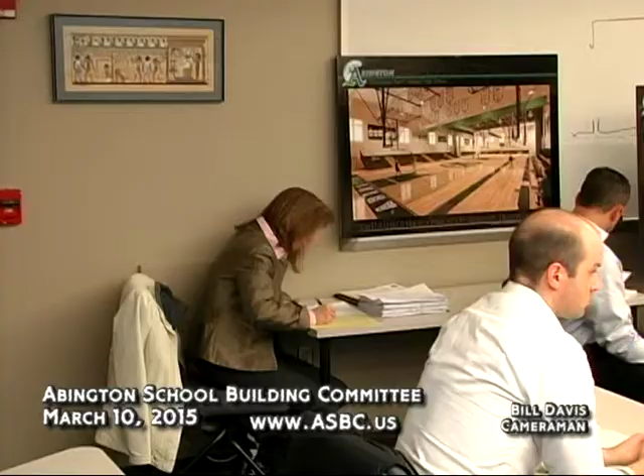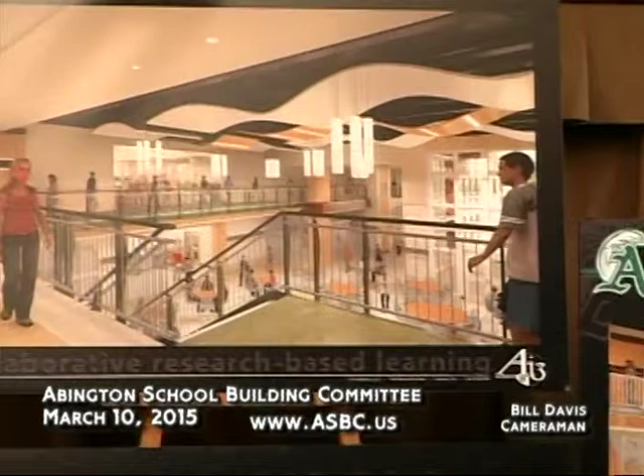At this point, I'd like to call Troy up to provide a design update. Over the past month or so, the designs have progressed quite well, and we can really start to visualize the space with occupants in it, how it will flow. Troy will spend some time going through each of those briefly so we can get a better understanding of the flow.

Thank you, Mr. Chairman. So we're going to spend some time going through the interiors. It's a very exciting part of the design process because everybody gets to visualize the interior.

We visualized or provided visualization of the exterior. Now with the interior, with the computer-generated images, it becomes a really nice tool to be able to see the spaces in greater detail. If you remember, probably two years ago, we started the process of the educational visioning.

It involved 30-plus people through that process, several series of visioning sessions, workshops to identify what the interior, the feel of the interior, what the overall concept would be, beginning the process.

And we've gone through the exterior, the organization of the floor plan, the volumes, the adjacencies, the wayfinding, and breaking down this sizable building into a really nice scale for the students and individuals coming to see the building.

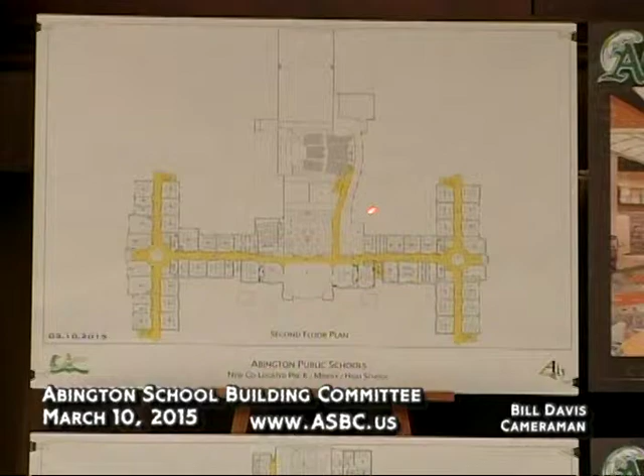The gymnasium. We're going to be talking about these spaces specifically: the cafeteria, the middle school cafeteria, the entry, the high school cafeteria, the library, the seminar room, the connecting corridor, the gymnasium, fitness center, and lobby space.

Some of the things that were talked about during those visioning sessions, and also came up during the working group meetings, were to create an inspiring, inviting, warm, friendly, nurturing environment to show the beauty and inspiration within the space, to showcase student work, to display art, both two-dimensional and three-dimensional work, both static and dynamic.

And how is the education and the activity put on display, really creating an environment where the students would take pride in their school and the spaces within the school.

The value of connecting spaces vertically and visually so that the activity is seen at multiple levels. We've done that successfully in working with the working group, the building committee, the faculty, the staff, the administration. And what you see here is the culmination of those efforts.

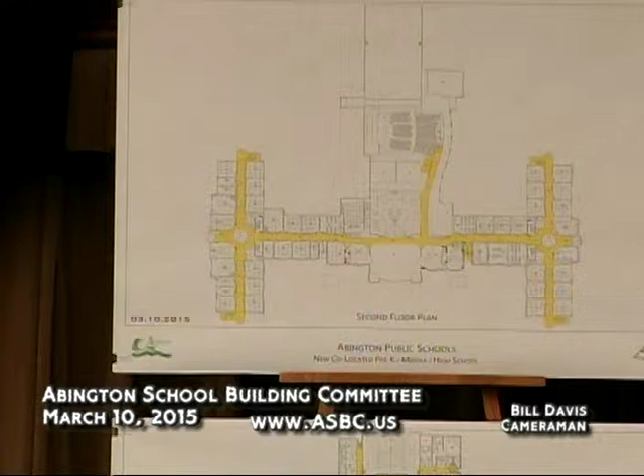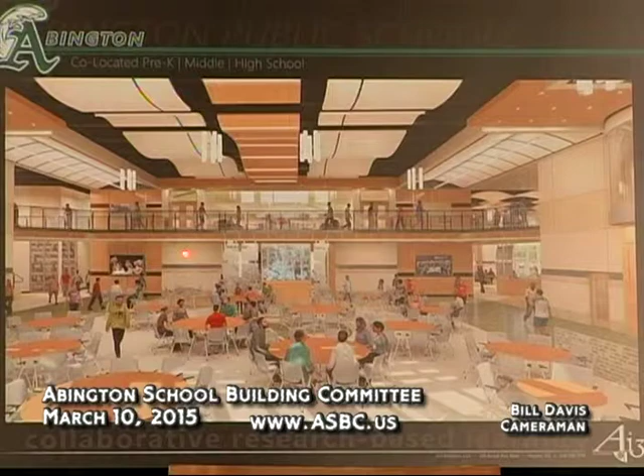This is the primary image looking from the first floor in this approximate vicinity, looking across the space, looking at the entry coming in on the middle school side, the entry coming in on the high school side, the corridor connecting the two classroom wings, the library beyond, and then beyond this visual screen and functional screen is the kitchen.

You can see the use of materials, the use of textures, the volume to define the space, with wood panels here, a visual display, a TV display here, wood panels on this side. When I say wood panels, they are particle board with a veneer on them, a very economical way to provide some warmth and inviting textures in the space.

The same with the panels at the ceiling, standard MDF panels that have acoustical value. Within this space, the acoustics, given the fact that it's a two-story space, it's going to have a significant amount of students within it. The acoustics need to be defined, so these acoustical panels help mitigate the noise levels within the space.

The flooring uses linoleum sheet flooring for a low maintenance material, as well as an opportunity to provide the space with some signature design for the town of Abington.

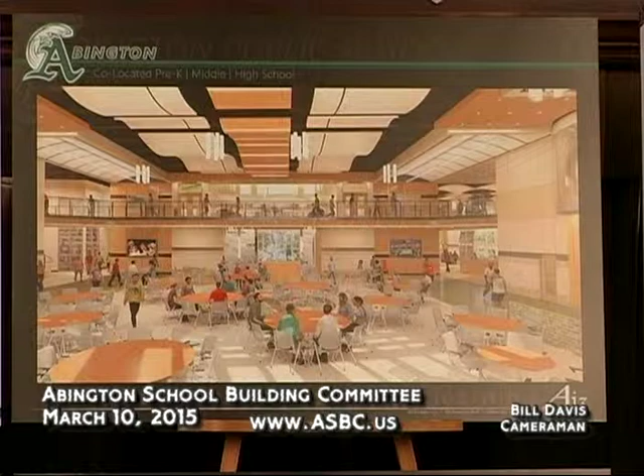You can see the walls using color to change, an easy way to change the visual and textural component of the space. Down low at the floor level, we have porcelain wall panels or porcelain wall tile, a very hard, durable, low maintenance material.

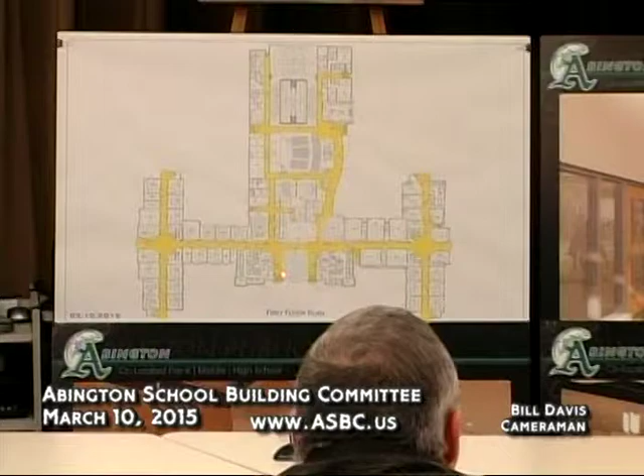There's a display up at the second level that could be used for the history of Abington. In addition to displaying student work, both dynamic with the LED or TV screen and static with display cases, we're earmarking several zones within the building to display the history and highlights of Abington.

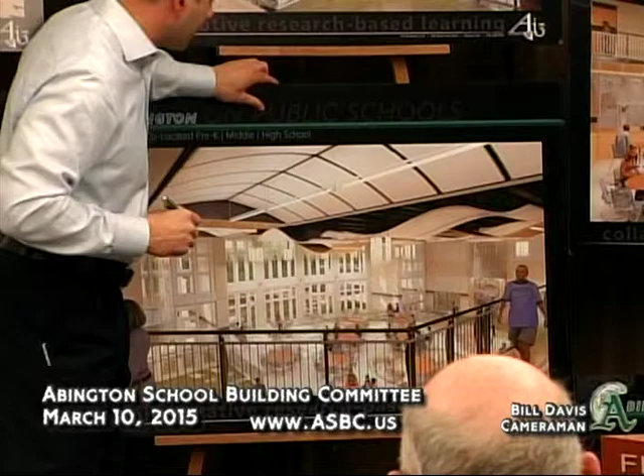This particular board is showing the view from the second level, looking back toward the entry, with the high school entry here and middle school entry here. You can see the nice natural daylight coming into the space, which will also make its way as borrowed light into the library, maintaining both natural lighting and views to the exterior.

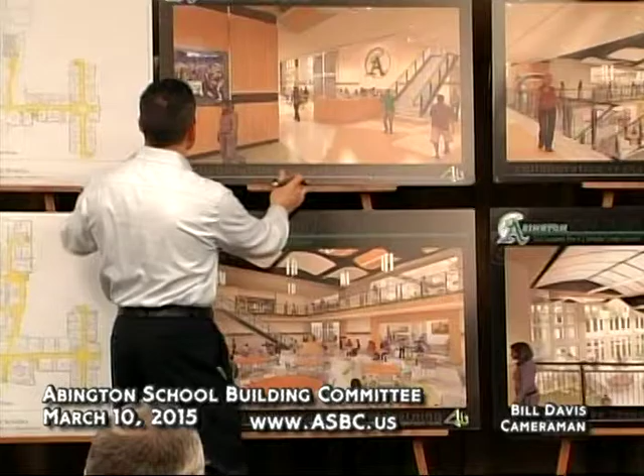This image is looking at the high school. Standing about here, looking across the connecting corridor above and into the high school cafeteria, and then out through the glass windows located here, we're looking through the stairs going up to the second level, through to the high school cafeteria. You can see a large mural here. We've identified the Abington logo, but it's really earmarked for student personalization, identifying a space so students can take ownership through banners, images, and graphics they can personalize within that space.

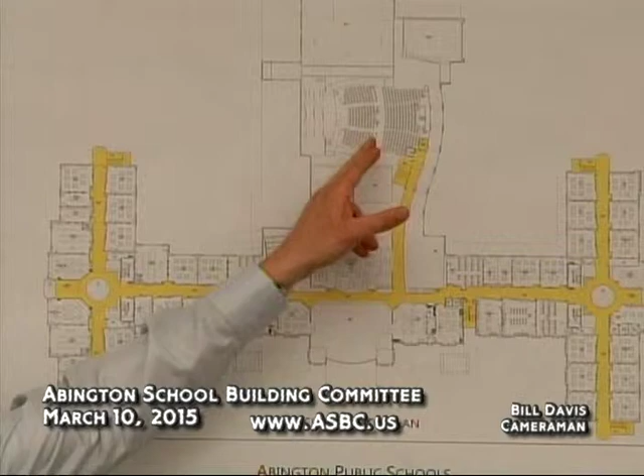This image is looking from the stair on the second floor, right at the top of the stairs, across the space and the bridge corridor that connects the auditorium. We're looking from here across this space, with the bridge connecting to the upper level of the auditorium, and the glass transparency into the library located here.

The serving area on the first floor is located here. The materials within these two spaces, being contiguous, are very similar to keep the design aesthetic consistent, with the lighting, the curved acoustic panels, highlights of wood wainscoting, and the porcelain pavers or porcelain wall tile at the base.

This space is the same directional vantage point, but on the first floor. You're looking across the space from the first floor with the serving line, the Green Wave Cafe located here, the connecting corridor leading to the upper level of the auditorium, the library located here, and glazing to the high school courtyard on the right-hand side.

You can see the materials we're using are very similar, low maintenance, economic materials, with the porcelain tile, the gypsum drywall with a change in paint to accent horizontal banding, and the use of veneered wood panels located here to really create a nice warm environment.

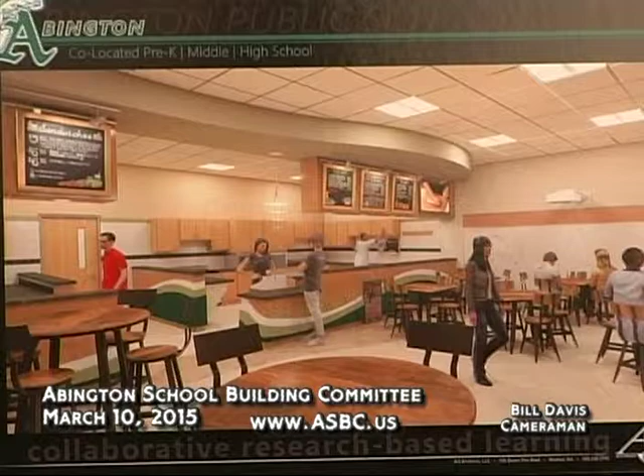I'm going to bring this across to the front so everybody can see. This is an image of the interior of the Green Wave Cafe, and on the first floor this is the plan area of the Green Wave Cafe. We're standing here, here's the entrance to the high school cafeteria. Looking across is that image we looked at, and this vantage point is right inside the entry doors, and it works as a cafe.

It works as an instructional space with standard 2x2 ceiling tiles, a soffit, and 4 teaching stations—2 here, and to the left of the image there are 2 additional teaching stations.

Porcelain tile floor. You can see the enlarged whiteboard area to the right with an interactive projector, a transaction area with lighting, and storage above with use of a display that can be changed, interchangeable, and changed when necessary.

And in that particular space, use of really economic and functional materials as well, with a tile backsplash for easy cleaning and easy cleanup and use.

On the opposite side, we're going to switch over to the opposite side of the middle school cafeteria. Located here is the student seminar space.

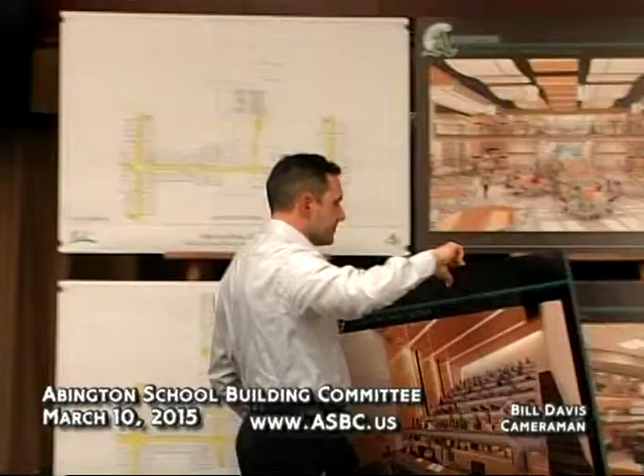This particular space is designed for 89 students. The panels you see here are the perforated acoustic standardized panel system for the acoustics on the ceiling, with a very clean lined design.

LED strip lighting here, and one of the things we discussed with the working group was the fact that this lighting—a question Jay brought up from a very functional perspective—is LED, but it's also located just behind in the walking section of the aisles, so it's easily accessible if it does need to get changed. They are extremely efficient and long lasting, but a light is a light, and sometimes they definitely need to be changed.

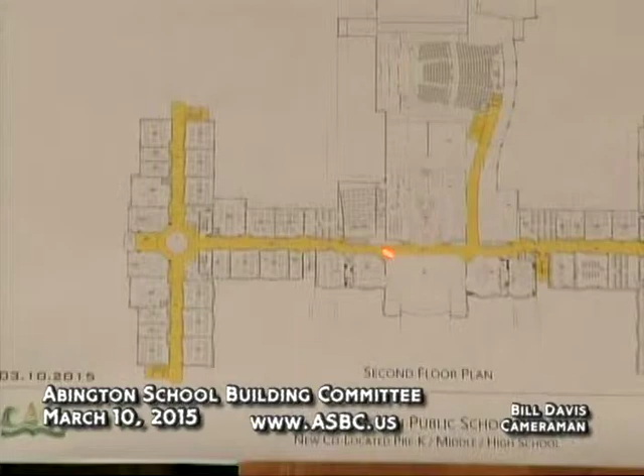This particular space has carpet in the aisles, a really nice volume, and access from the library at the second level. You can see right here from the library, and also accessed from the first level off of this corridor.

And it'll have a local sound system, storage you can see to the left, and an interactive whiteboard or interactive projector. It has Wi-Fi, power, and data at each station.

The aisles—some of you may have seen some of the other schools we've done and that others have done. One of the concerns we discussed as part of the working group process was identifying and making sure the aisle width is larger, so that if a student is sitting in a particular location, a student behind can walk and pass by without having to scoot along.

So we've widened the back of the access aisle. We've also increased the vertical height of each of these risers in order to get access to the second level and the first level, and that provides some really nice sight lines down to the presentation area. In here, just the materials as well—carpet, painted concrete beneath all of these stations, and then drywall on the walls and the perimeter.

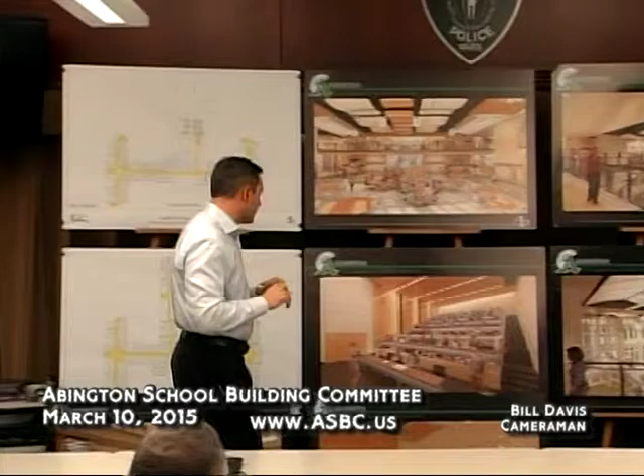Okay, so we're going to shift gears a little bit. We're going to walk along, take a walk along this corridor right here.

So the connecting corridor we mentioned is on the first floor, and you may recall this being a space with visual connection to the courtyard, but also to the fields and the lobby as well. There's a lot of natural daylighting there.

There's a lot of really nice light. This particular image shows the aesthetic, the volume, the transparency, and then coming down to the end of the corridor, the fitness center as the focal point.

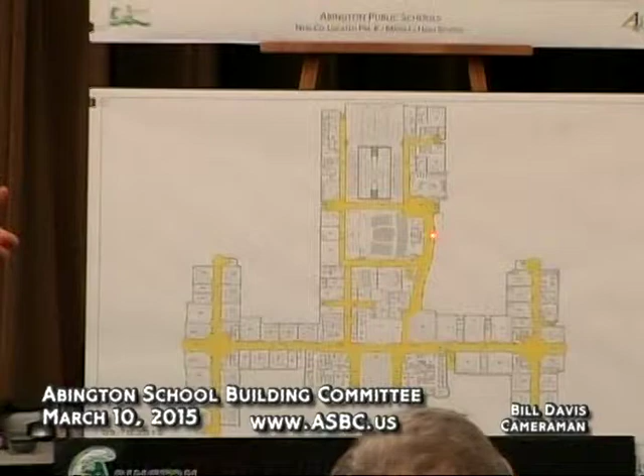So this is also something to be used. We've got bathrooms here, so when there's an event going on, whether it's in the auditorium or the gymnasium, this will likely be a spill-out area where we'll have seating on the side of the corridor, as well as access to the toilet room facilities in the next bay, and then seating as well.

As you walk down the corridor, there's a series of spaces directly associated with the nice transparency to the courtyard and the fields on the right-hand side. As I mentioned before, the same use of the veneer panel with a standard suspended ceiling that you see here, and pendant light fixtures on the side in each of the alternating bays.

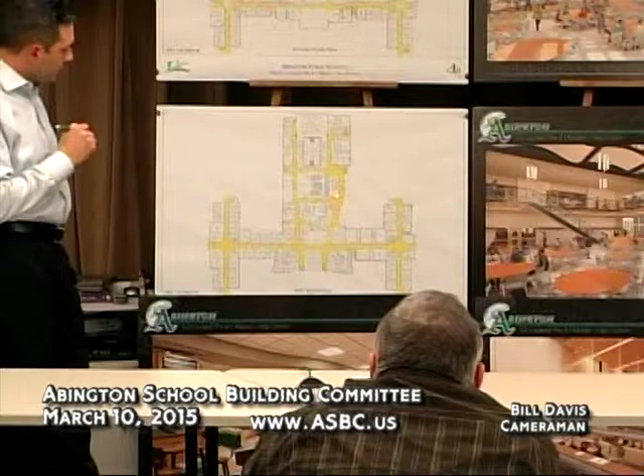Going down the corridor, the floor material is consistent - sheet linoleum flooring, low maintenance, very good from a design perspective, good use of material. That's consistent with the lobby moving down this corridor, the high school cafeteria, the middle school cafeteria, and through these corridors and the nodes. So the intent with those main public areas is to use that linoleum flooring.

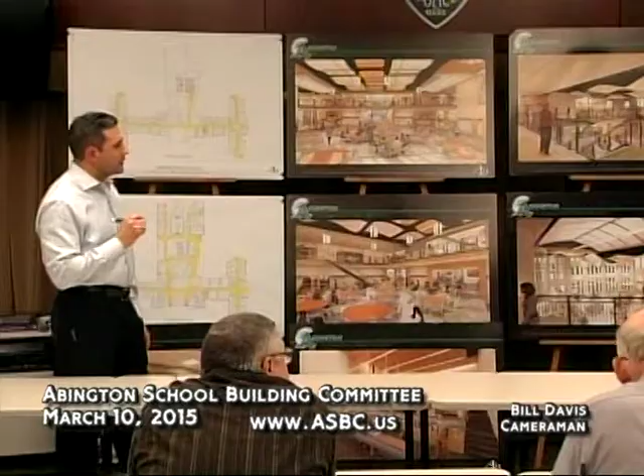As you enter at the end of the corridor here, as you enter the lobby, it's a 2-story space along with the fitness center, and you can see the transparency really trying to highlight the 2-story connection between the lobby, the fitness center, and then also looking through into the gymnasium within this space.

Use of very similar materials with softening, with 2x2 ceiling tiles, gypsum wallboard, use of the wood with the consistency of the aesthetic. And then one of the things that...

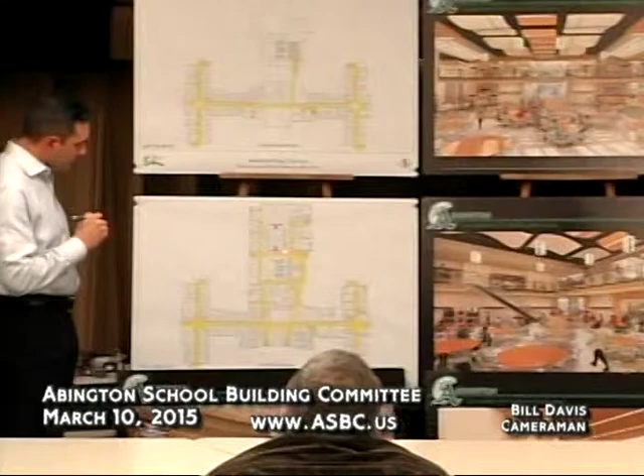That we talked about during the working group is not necessarily in this location, but in the location at the gymnasium, is to provide at the lower sections of the glazing some form of a solid panel within the glazing at the end of the gymnasium, located here and here. A minor point overall, but just a discussion topic that we had.

And the idea was that although the glazing is tempered glass and is something that is used regularly within this type of a space, having it really low on the ground or the floor level, we would provide a solid panel, just something that we discussed.

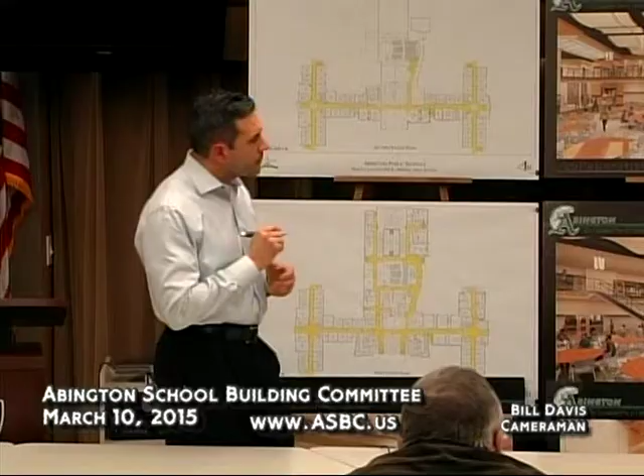Entrance to the auditorium located here, and then moving to the gymnasium. Pull that over to the front.

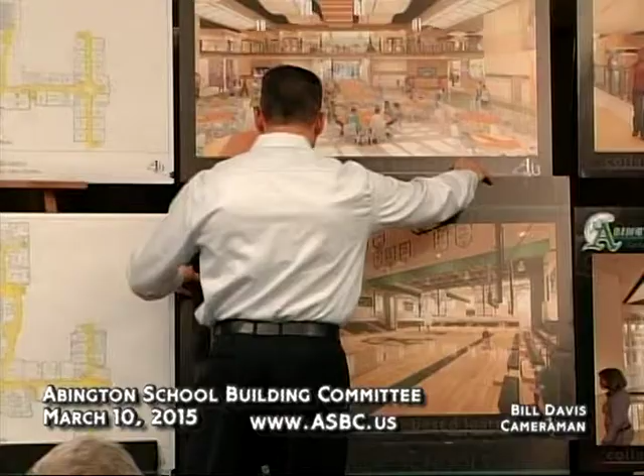So the gymnasium space, this vantage point is looking from the entrance. As you would step in the doors from the lobby, you would see the high school gymnasium, the middle school gymnasium beyond, that is divided by an operable acoustic partition.

Then each space is further subdividable by a curtain, a vinyl curtain. The high school in half, and then this half further subdivided, so you have 3 teaching stations, and then the middle school with a mid-court curtain divided into two teaching stations.

Bleachers on either side of the gymnasium. We're showing some banners, potentially the relocation of existing banners or some new banners. Usually what happens is the district decides we've got a new building, let's as part of the project create and get some new banners to display within the rafters. We're just showing that as a possibility, using some graphics to really personalize the athletic space.

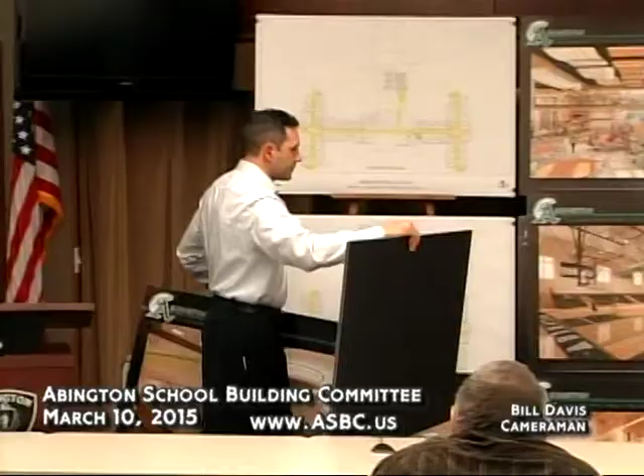Let's see. So, library looking from the second level into the library, so you can see from the middle school cafeteria up through to the library. And if you recall, you can also see that space from the high school cafeteria, and you can see the graphic beyond the glass. That's this graphic right here.

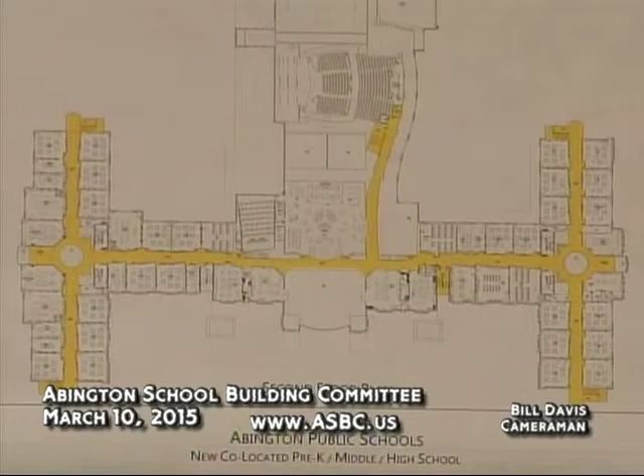So we're looking inside the space from a teaching area on the second floor. If you see the middle school entry here, high school entry here, this right here is the line in which this particular transition from a single story to a two-story occurs, and the graphic along this zone here. This particular image is looking from this corner across the space at that wall.

Below this line is the glass enclosed, secured teaching area, and one of the requirements was to have transparency, but also have some acoustic separation within this particular teaching area, and that was achieved with its location and use of materials within the space. You can see the stacks, book stacks here, behind the research station. This is the window wall looking into the high school cafeteria.

The upper level—if you recall, the library is two stories, but it's on the second floor, so that pops up. This section right here pops up above the second floor roof, which allows natural daylighting into the library space. It's a really nice way to get that transparency from the second floor, and also allow direct natural lighting.

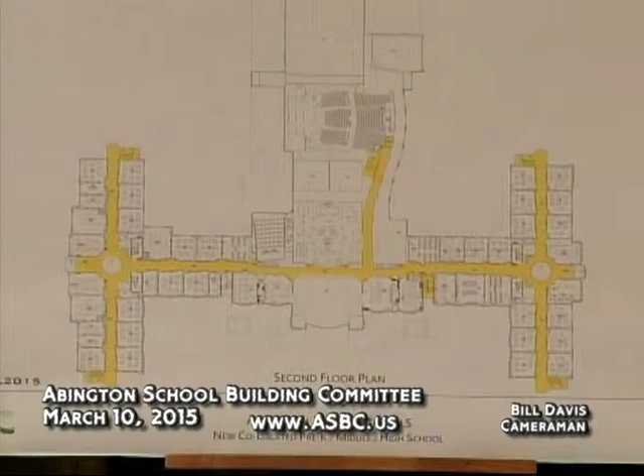You can see it's a very simple but very nicely proportioned space. Use of paint to transition materials with drywall, 2x2 ceilings, soffits with some cove lighting for accent, and then the research station here set up by some soffitting and some perforated metal grills that will also be used for HVAC and delivery of air. The entrance to the middle school side, entrance to the high school side with soft seating located here, and soft seating on the opposite side located here. Carpet throughout.

And I think that's it. That's a lot of info to take in.

Can we just make a point that for anyone who's watching this video, that these might not be the final designs, or they're certainly very close to it, but they continue to be tweaked? Yeah, and we'll try to get copies of these up on the website in the very near future.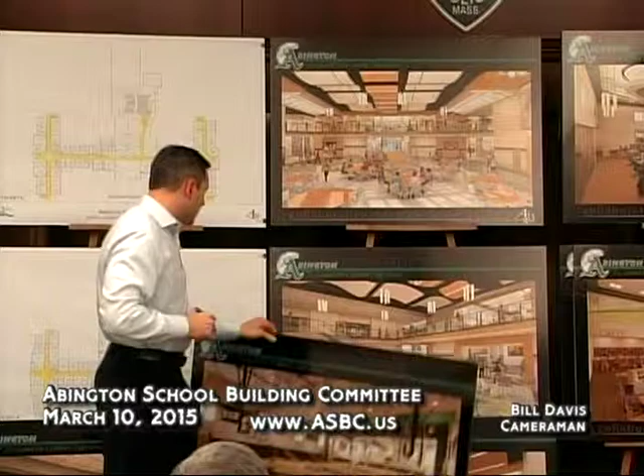Yep, that's a really good point, Sean, because one thing that I wanted to mention that I forgot in the initial discussion was one thing that the administration and the working group asked us to look at a little bit closer. Two things, actually. One was this—let me pull this up just so you can see.

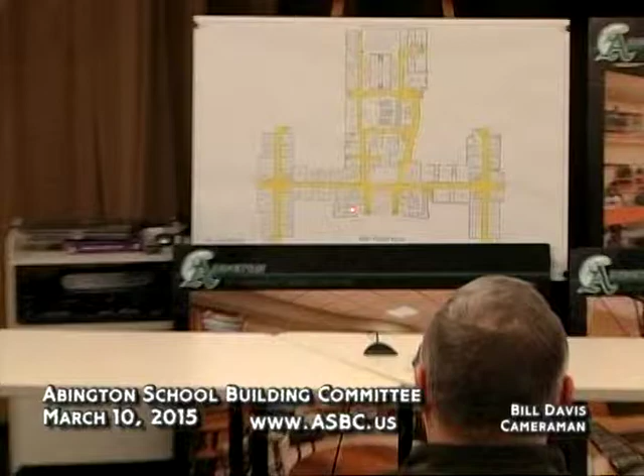This is, on the middle school side, the egress point, or the point in which if somebody comes into the building, they've been buzzed in by the administration through the vestibule into the waiting area of the administration, and they've been allowed to go into the building further. This would be the door that they would exit from the office and into this section of the two-story cafeteria space to get to the remainder of the building.

One of the things that the work group and administration asked us to do is take a look at possibly creating something a little bit more solid in screening in this area, basically up to the point of the door, and then it transitions to more of a solid-void, transparent type of wall. And when I say a wall, the working group liked very much the volume of the space and the overall configuration of the space, but just wanted something so that when somebody walks out the door here, they have a visual screen from the main middle school cafeteria. And one thing we talked about is that this is a location where we could put additional

history of Abington display, or something that really speaks to the initial view that somebody gets coming into the building, as the history of Abington.

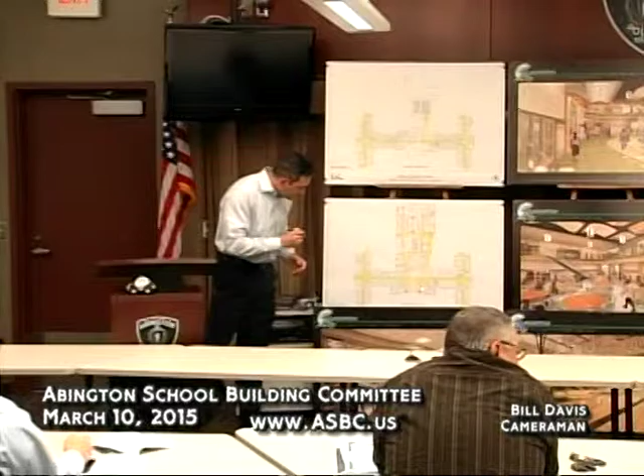You mentioned the screening on the entrances. Would that be both entrances? Yeah, on the middle school and high school side. So that would be located here and also on this side. So when somebody's egressing the high school side, they would have a visual screen as well.

One of the things the working group took a great deal of time discussing is having something that is inviting and attractive, worthy of the investment the taxpayers are making, but also being very responsible with the taxpayers' money, ensuring we're not taking away from other components of the building. The thought is those main spaces such as the cafeteria and the gymnasium area, the more publicly accessible areas, we dress up a little bit, as economically as possible.

And then the other areas, such as a hallway used by students to get between classrooms, we don't spend money dressing those up. I like to draw parallels, and in the working group meeting one of the questions I asked is...

Help me understand how this compares to a Whitman-Hanson or an East Bridgewater, from an entryway perspective and the money being spent. Because it's shared space, when you walk into either Whitman-Hanson or East Bridgewater, you walk into a grand entryway, or foyer, that really, the only purpose it serves is being a big dressed up foyer or entryway.

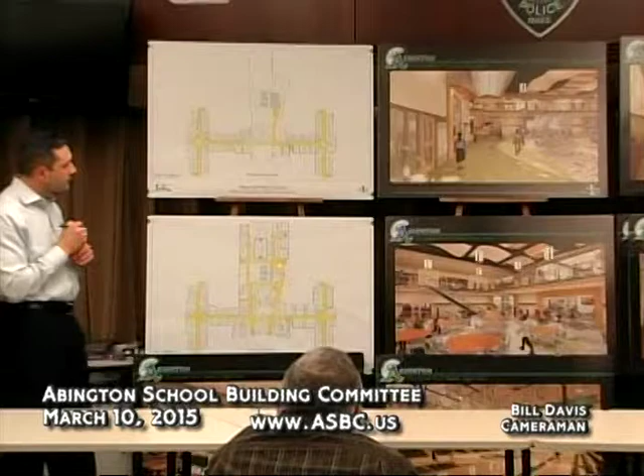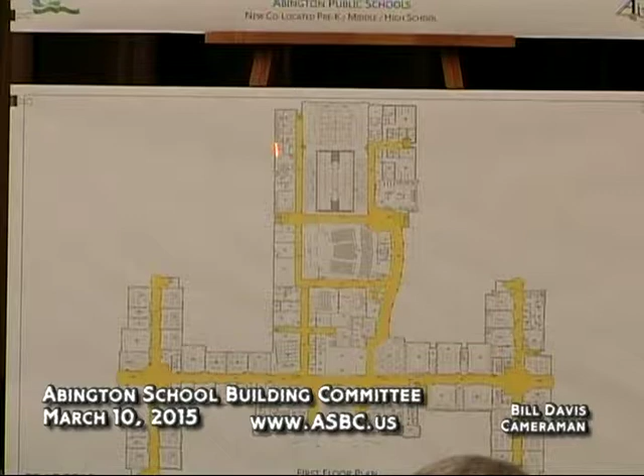Yeah, that's a good question. There was one view that showed the two entrances. If we're talking about students arriving in the morning, the entrance of high school students would primarily occur at the lobby space here. So in this particular rendering, through these doors and then down this corridor to their wing on this side. The middle school students would enter on this side, being dropped off along the side of the building here, and then travel down this corridor to the middle school side.

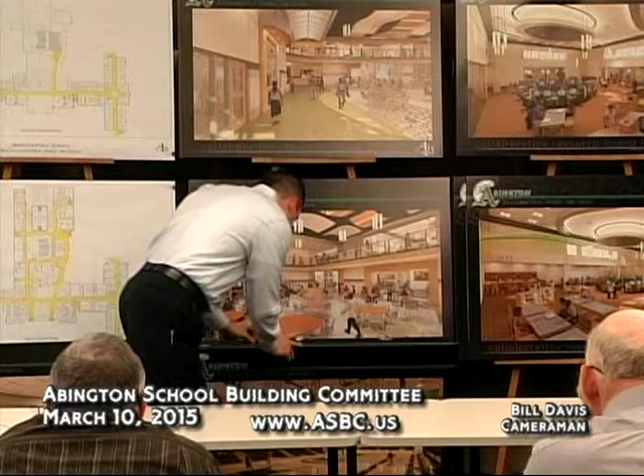And the rendering that you're thinking about, this is the middle school side, so they come across this corridor and then either upstairs or into that corridor there, or this is the corridor here, and then to the left on that rendering. Is that the rendering you think, Mike? This one, maybe that one.

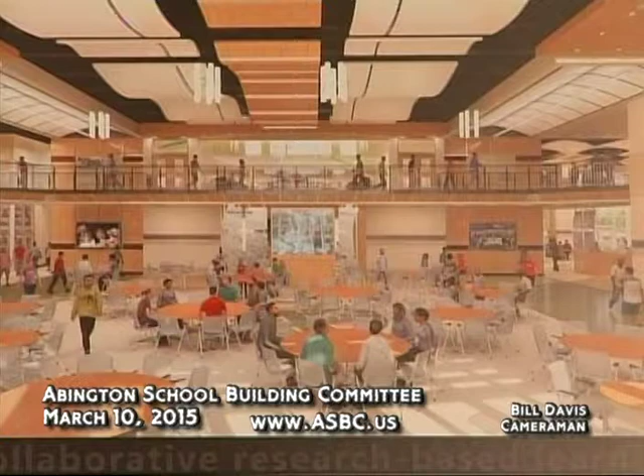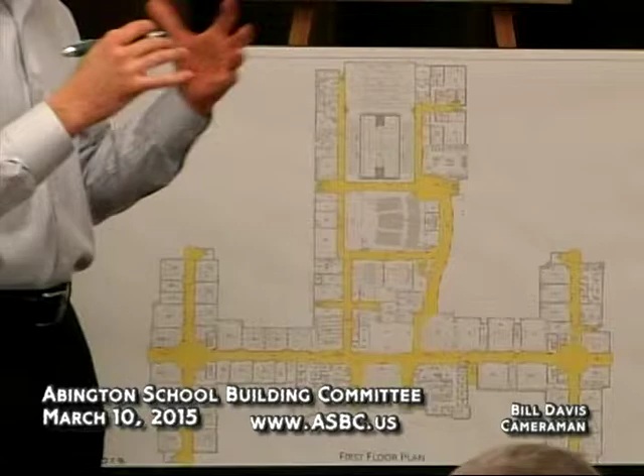Yeah, so this one, you can see the middle school corridor on this side with the beginning of the stairs to go up to the second floor, or to the access corridor on the first floor, and the high school cafeteria here, student dining. So the students would come along that student dining and then peel off on the first floor to the high school section. So in the morning they wouldn't commingle.

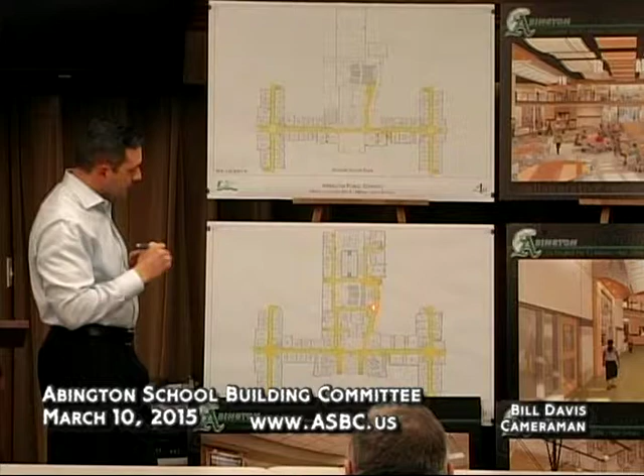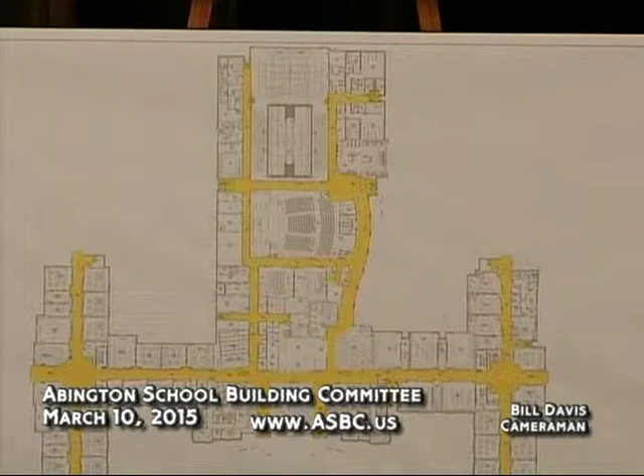If you remember, the plan specifically delineated middle school entry and high school entry, with the high school students traveling along this corridor to their respective wing, and the middle school students traveling in this corridor to their respective wing. They're coming in after entry time, either on the high school side to the administration or the middle school side to the administration, then peeling off into the corridors. The high school kids, 9 through 12, will be on one set of bus routes, and the 5 through 8 kids will be a separate set of bus routes, so the school days will start at least a half an hour to 40 minutes apart.

So we'll never really see the high school kids and the middle school kids, certainly not the buses, arriving at the same time. High school will arrive first, go into their corridor and their wing, and start school. Then the middle school parents and buses will come, go into their corridor, and start school. The reverse will happen at the end of the day. So there's not only physical separation with the building and hallways, but also time separation.

Could you go to the view of the seminar room? Yes.

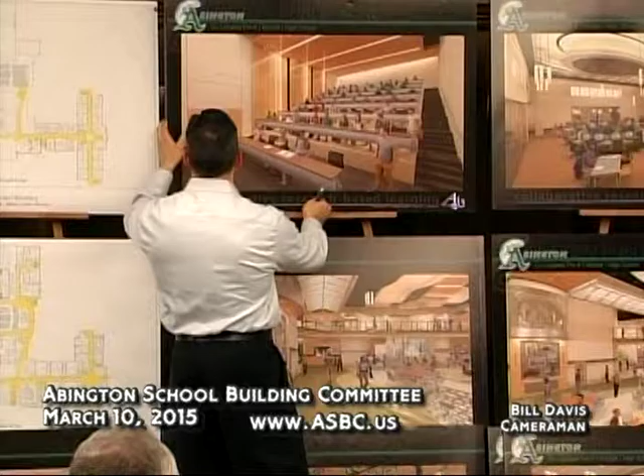Is that rendering accurate? Is it gonna have that kind of drop from the second level to this? Yep, yep. I was just noticing the carpeted stairs — I know that's probably better acoustically, but I see it as a lot of maintenance.

I don't know, maybe tile on the stairs would make better sense, just a thought I had looking at it. Sure, we can look at some other materials. We generally stay away from tile just because of the slip factor — tile has less slip resistance compared to carpet. We could look at rubber tile or a rubber system, though that would start to take away from the aesthetic.

I find that when we go into these spaces, there's so much concrete in the actual seating areas that's painted — it's almost like you want to use the carpet to bring some richness back into the space. I'd be a little concerned that between the painted concrete at each level of seating, if you put in some type of rubber system, you could get the risers covered too. If you did tile, you'd only be doing the treads, not the risers. I think you really do want something in that open aisle space to take away from just the painted concrete look you'll see on the risers for the rest of the space. But it definitely is a good point about overall maintenance and traffic.

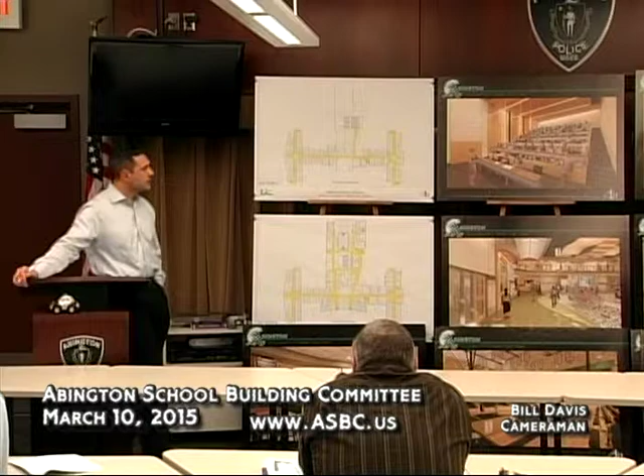You mentioned the tempered glass in the gym and use of glass in the teaching room, the library, and other areas around the building — although it's a good idea for visibility, what kind of glass is it? Is it actual glass or a plastic like Lexan, or some other material?

It is glass in the locations you mentioned. In areas that are lower or require tempered glass, we would use tempered glass for that additional durability. In some cases we may even use laminated glass, which is essentially two thin pieces of glass with a very thin sheet of plastic in between, providing more durability and rigidity. Tempered glass is glass where the outside surfaces are cooled very quickly, creating a much more durable, higher strength surface on either side.

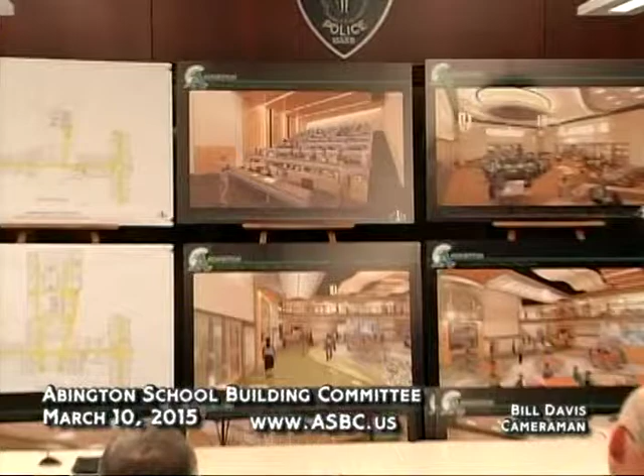Troy, again on the seminar room — the stairs with the carpeting on it — is there another set of stairs on the other side, or is that the only egress? This is the egress point and the access corridor.

We did talk about that during the program meetings and working group meetings. If another access aisle was provided, we'd lose about 14 to 16 seats. Because we increased the width of the aisle, it wasn't really necessary from an egress standpoint, but from a functional standpoint, it was decided not to eliminate that many seats, provide one access point, and then provide a wider aisle between the seating.

Speaking of questions that come to mind now because of all the tours we've done, there looks to be a decent amount of presentation space, if that's roughly to scale. When you bring in somebody doing a demonstration, you need that extra space.

Yep, this is to scale. Obviously, if you sacrifice that, then you lose seating also. You don't have so much space in that room, but that's a nice amount of space right there.

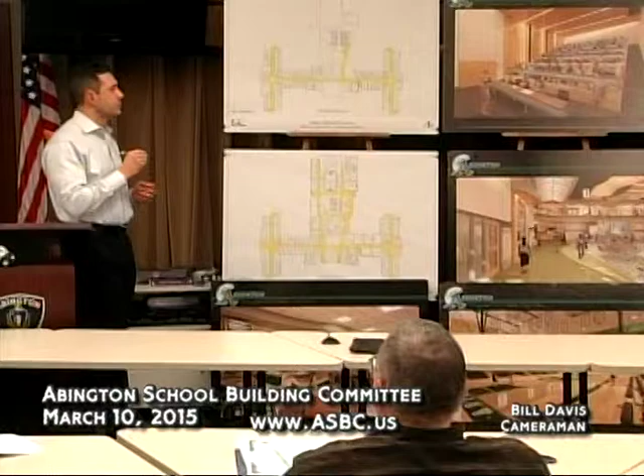That's another good point you bring up, Peter. Some of the other schools that you had toured as well had, in the project seminar space, a presentation area that was pretty compressed, and we've expanded this front section to allow for a greater area for presentation. That was one of the benefits of the tours - one of the things we learned from the mistakes, or regrets, of other schools that wish they had left more space like we are designing in.

Troy, can you just go back, for the benefit of everyone, about the ceiling of the entranceway? We talked a lot about it during the work meeting. Can you explain again how the ceiling looks different than a regular ceiling, that it's not just artwork up there, that everything has a purpose, but it's also not an expensive ceiling at all? The ceiling Sean's referring to is in the middle school and high school cafeteria.

We had a discussion about the design of these curved panels, what their purpose was, and the possibility of just putting ACT ceiling there. ACT is acoustical ceiling tiles, a 2x2 grid, similar to what you see here.

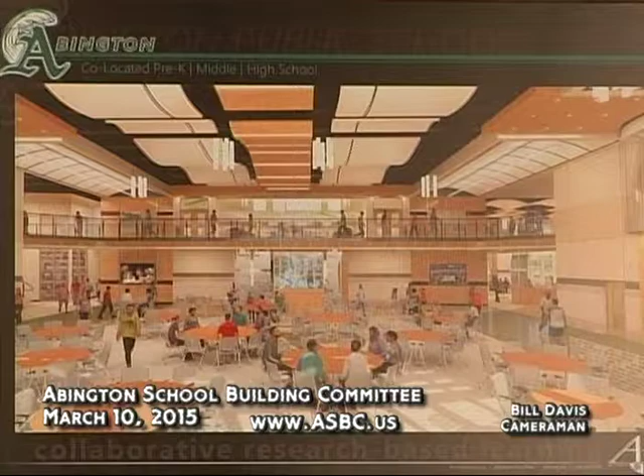Going back to the clouds again, do they impact the fire suppression systems at all, with sprinklers or anything like that? They won't - we have to design the fire suppression system to coordinate with their locations. We'd have to do that with any particular space, and that would not affect the distribution of the fire suppression system.

Those clouds are made by multiple manufacturers too, so it's not just one manufacturer - they'll be competitively bid, so it's a commodity type product. We made the comment that we didn't want to give the impression those were on loan from the Museum of Fine Arts - those are standard catalog things. It just makes the space look better without spending a lot of money; it just looks nicer.

Any other questions or comments for Troy? Thank you very much, nice presentation, thanks. Thank you.

All right, next order of business on the agenda, and I think it'll be a very brief discussion: consideration regarding radiant heated entry sidewalks.